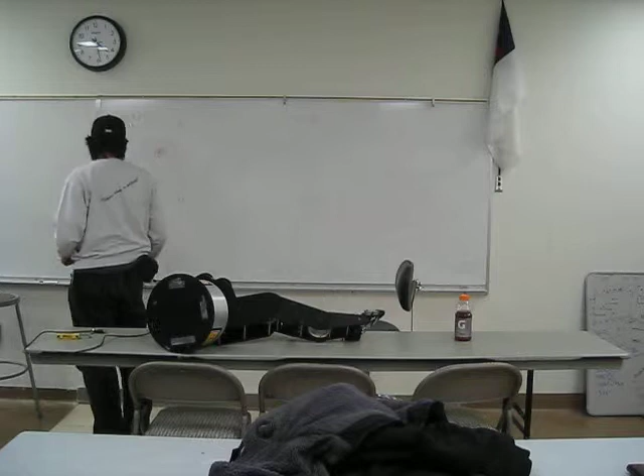Okay, so we have our power source, right? Battery. What does that battery connect to? The battery has a plus and a minus.

Well, you guys all know how electricity works? It's like water, kind of, yes. It can be, well at times you use the water analogy to understand it.

We say that electricity on a power source, like a battery, is trying to flow from the positive terminal back to the negative. In actuality, what's happening is electrons are going from negative to positive, but that doesn't matter. You can look at electrical flow either direction, but most people like to think of it as flowing from positive to negative, as if it were water flowing.

But like water, it needs something to flow in. So we use wires, which have very low resistance, so that electricity easily flows through them. Everything surrounding it, like the plastic insulation or the air around you or your body itself, has higher resistance, so the electricity doesn't flow through those things.

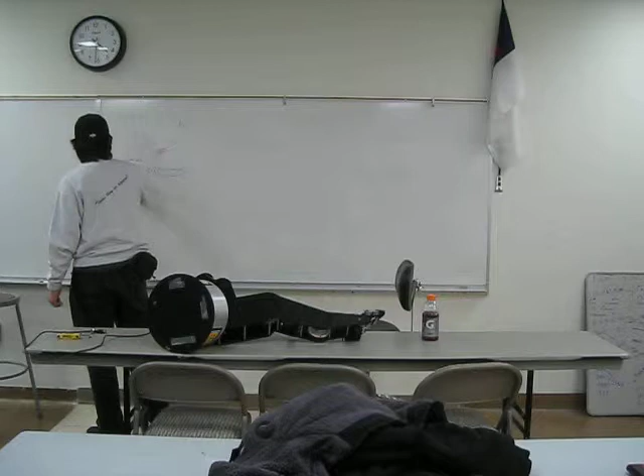That's not exactly true. Okay, so this is our main breaker, which you all should know how to operate. Then this goes to what we call the power distribution box. Okay? So that has a plus and minus connection.

What this is really just a fuse panel. We'll have a bunch of different breakers in there. So internally, the plus is connected to each one of these breakers, okay? And they'll all be rated for something like 40 amps or 30 amps. Okay? These are resettable circuit breakers.

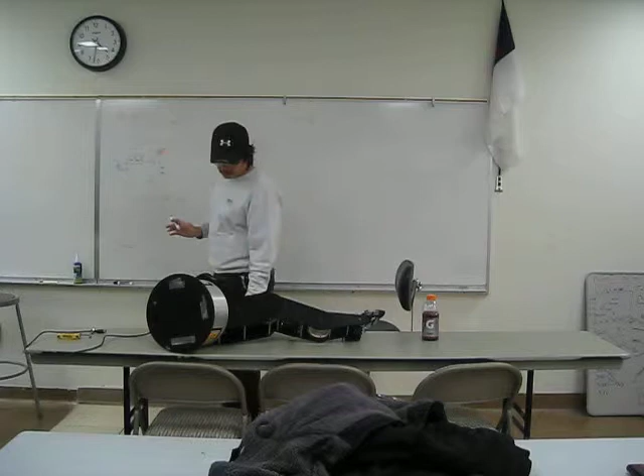What happens is if the current exceeds this amount, this rating, this will actually open up and stop the flow of electricity. Okay? Until this cools back down, and it makes the connection again.

Get that? So say externally here, you accidentally wired this to here. There's this extremely low resistance path back to the battery, and this current can be over 100 amps. Okay? As this high amount of current flows through here, it will heat this wire up. If it didn't have the circuit breaker, this wire will probably eventually heat up so hot that the insulation will catch on fire.

Okay? If you were to touch this wire, it would just burn right through your skin into your flesh. It'd be very, very painful. Okay? And can cause a fire. So, to prevent all that, we put circuit breakers in there.

So on the board, you'll see a bunch of red and black connections. Each one of the red connections goes to a circuit breaker. Each of the black connections actually gets connected to this negative terminal up here. So if they were to take two of these, one leg of this, and go to a speed controller, that then goes to a motor, which acts like a switch. So if it's full on, this motor will be running at full speed.

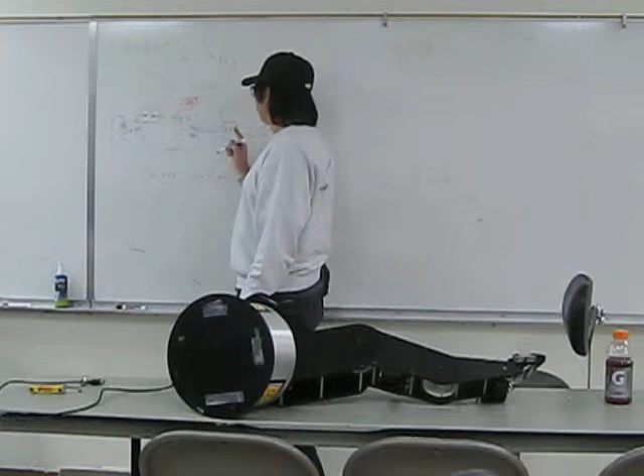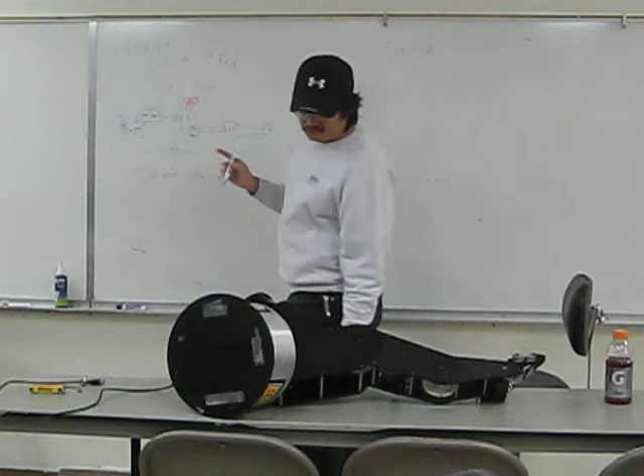There's actually a little computer in here running a bit of software that can switch this on and off about 2,000 times a second very quickly. Based on the amount of time it's on each time it turns on, you can actually vary the speed of this motor.

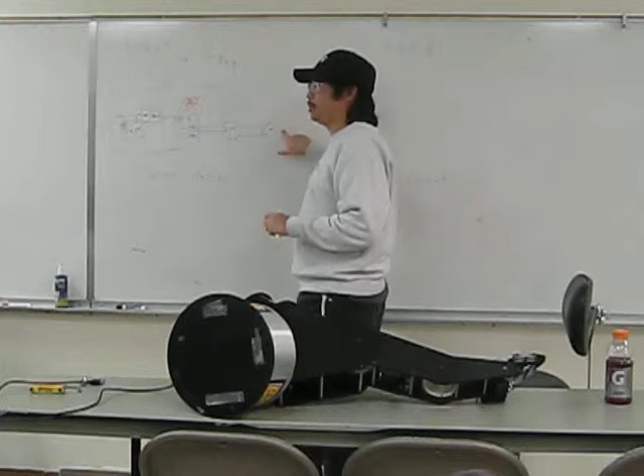So we're going to have a lot of these. We're going to have at least 2 for the drivetrain, at least 1 for the shooter, and however many you guys decide you need for climbing.

Then the way this is told what to do is we have our C-RIO, which is going to be the brains of the robot. This is another little computer, and we're going to write the software for this computer to tell it what to do. One of the things it does is control the speed controllers.

So there's a control signal called PWM, which this generates. It's an electrical signal that goes to the speed controller and tells it how fast or in which direction the motor needs to turn.

Sidecar? Yeah, it actually comes from the digital sidecar of the C-RIO, but just for simplicity, the electrical guys call it that.

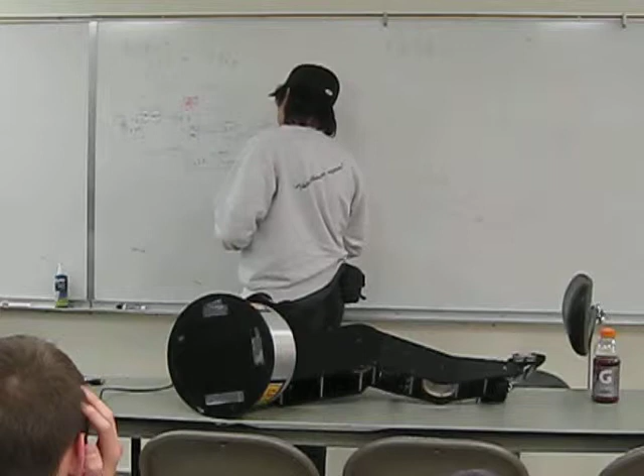The C-RIO software can turn this on and off, and then we can use this air pressure to move pneumatic cylinders. Those are the main outputs. We can also use these to turn lights on and off.

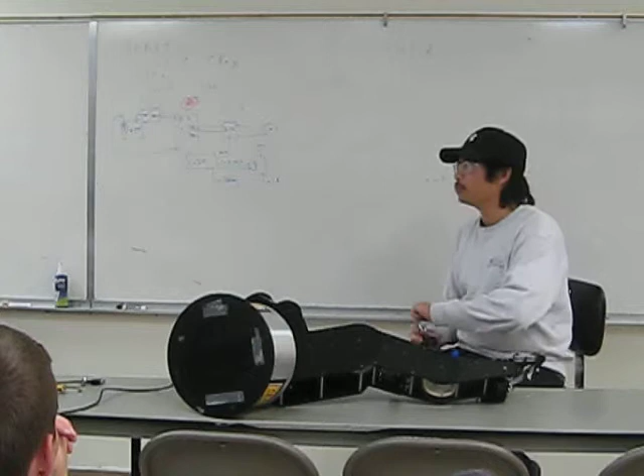There's also spike relays, which are electrical switches. If you had a spike relay hooked up to a motor, the only thing you could do is tell it to be off so it doesn't rotate at all, rotate full speed in one direction, or rotate full speed in the opposite direction. If you need a speed in between, you'll have to use an electronic speed controller.

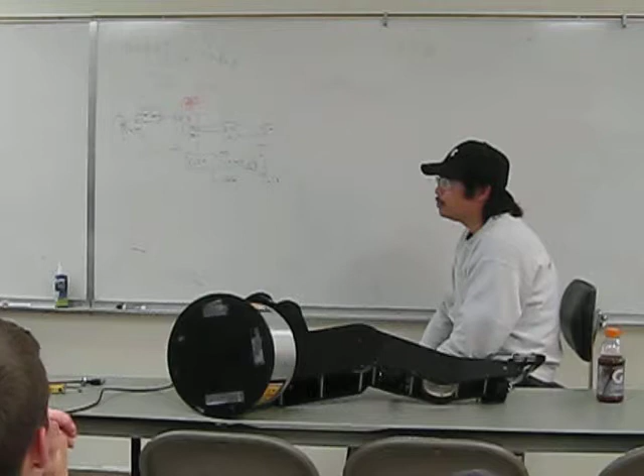So what are some of the inputs to the C-RIO? They can come from sensors on the robot - you can have photo sensors. There are also position encoders that you could put on the end of the motor shaft, so you could actually tell how fast it was spinning, or if it was spinning at all.

No? Okay, need some help?

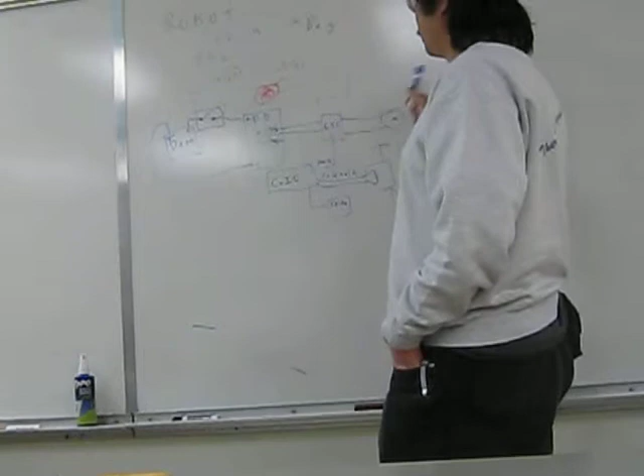A very important one is limit switches. Say you're using this motor to move an arm, but you need a way of knowing when to stop it. You can have a switch that gets pressed when the arm has reached as far as you want it to go. The C-RIO will know that switch is pressed, stop telling this speed controller to move this motor, and then the motor will stop and the arm will stop.

Okay, take it, watch this. Now...

A very important input and output on this is actually an Ethernet connection. This is how we're going to communicate to the C-RIO. All this stuff is in the robot. This is our wireless bridge or access point, depending on how we have it hooked up.

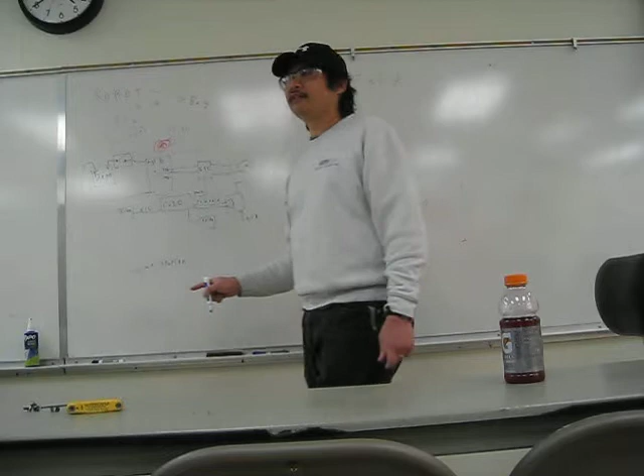So now, going back down to the driver station - the driver station has size constraints. Does anybody know what those are? Does anybody know where to find them? It's online. There's a size constraint, right?

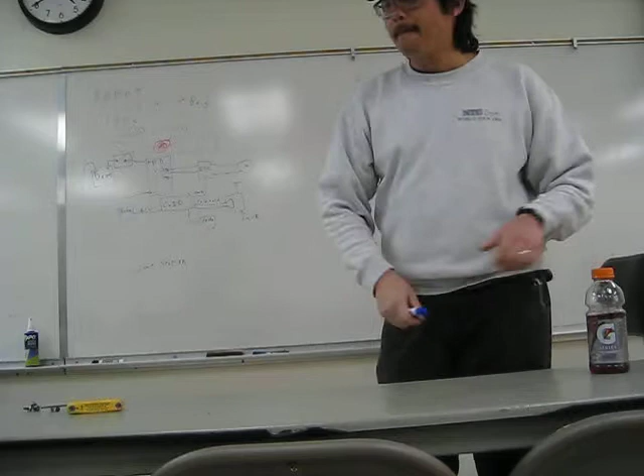Why? You only get a certain amount of space when you go to the field. On the field, at each Alliance wall, there's a shelf that your driver station must fit on. So in order to build our driver station, we need to know its size constraint.

Is there any weight constraint? I think so - no, okay. But the size constraint just tells us the maximum size it can be. We may have other reasons we want it to be smaller, so that it's easier to carry around, since it's something you're going to have to carry onto the field and off the field. So it'd be nice if it had handles and was only as big as it needed to be.

So the driver station is going to have some sort of mechanical structure to hold all the pieces it's comprised of together, so that we can just move it to the Alliance wall shelf as one piece. We just put it down, plug in the wires we need, so that can be done very quickly and be ready to play.

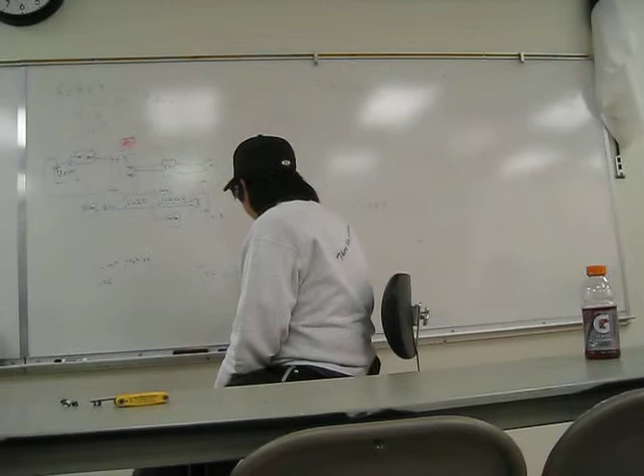This is actually, the heart of it is actually a PC, right? It's the little classmate computer, okay? Connected through a USB hub, we're going to have input and output devices, okay?

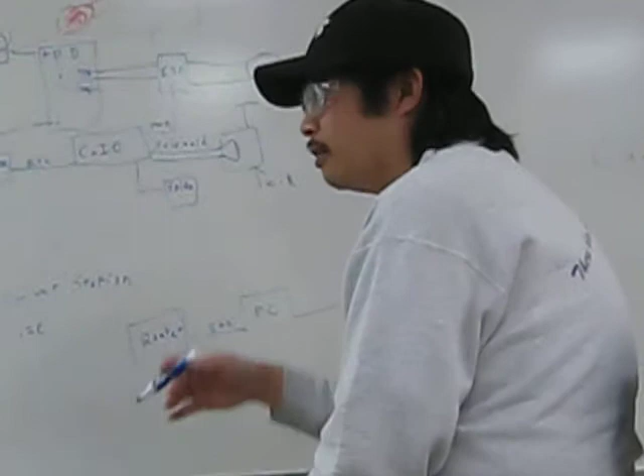This is going to have an Ethernet connection right now to a router, but then later on at the competition, this Ethernet connection actually goes to what they call the field management system, so that they're able to control our wireless connection to the robot and actually cut you off if they need to.

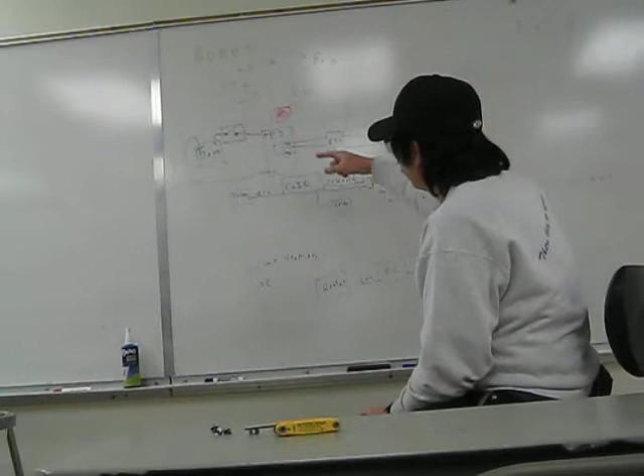So through the field management system, they can tell whether you're actually communicating with your robot. They won't start the game until they know everybody's got a connection between their driver station PC and the cRIO in the robot. And then during the game, if they need to disable your robot, they'll cut off this wireless connection, okay, for safety.

So in this PC, you have a piece of software called the Driver Station. What's its official name? Driver Station, I think it is called. There's a program in there called Driver Station, and what it does is it communicates through the USB port to any input devices you have.

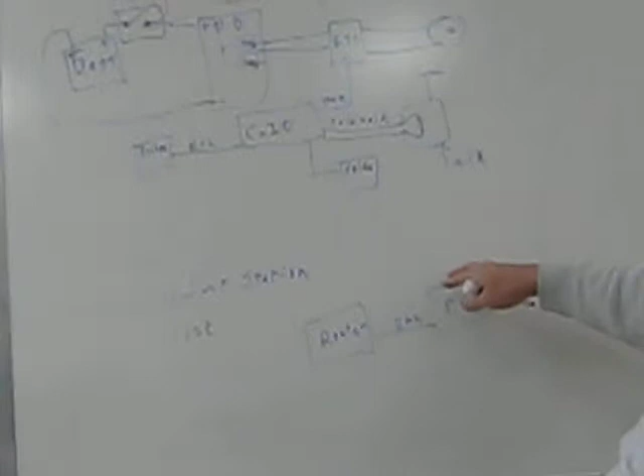It figures out what it is you want to tell, and it reports the position of all these input devices to the robot through the Ethernet port. So it will take that data, form it into packets, send that packet via Ethernet to the router. The router sends it wirelessly through Wi-Fi to here.

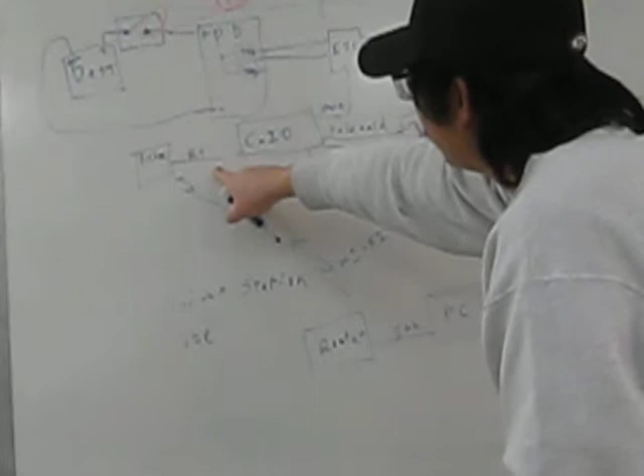And then this packet will be, by the bridge, translated from Wi-Fi back to Ethernet, wired protocol, into the cRIO. The software in the cRIO will see this packet, say oh this is for me, and read the information out of it, and then the software that you wrote that's running in the cRIO will know what that means. Oh, this joystick 1's x-axis moved, is at this position. That means I need to tell this speed controller to be at this speed.

This connection is actually bidirectional. So you can have sensors on here, like a temperature sensor. At the minimum, you need to have a voltage sensor that this reads, that reports that value back to here.

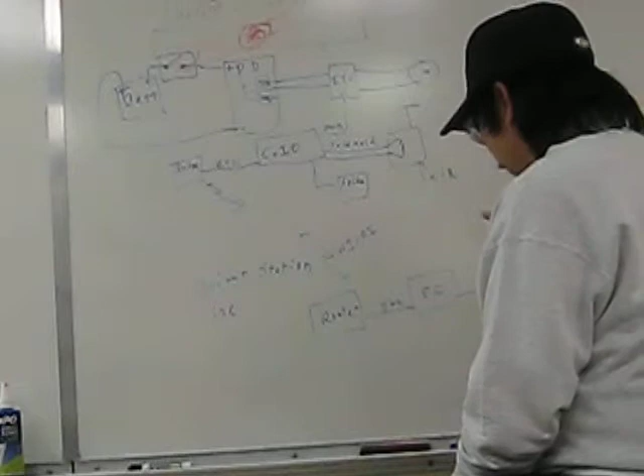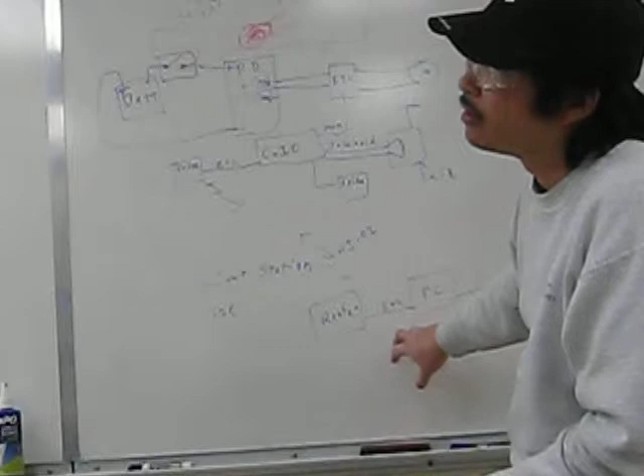And on the screen of the classmate, that's a separate program, right? Called the dashboard, I think. It's not part of the driver station - they all come up at the same time, I think, but there's another piece of software that will then display. Oh, is it part of the driver station, isn't it? I think we just call it the dashboard on the driver station. I don't remember its official name. Well, whether it's the same application or a separate application, the applications know where to get that data.

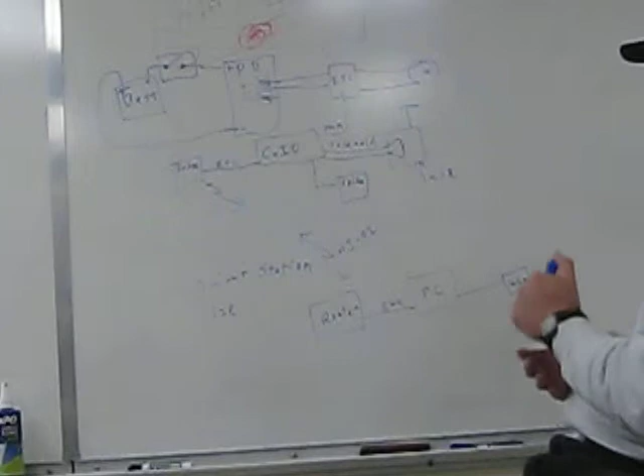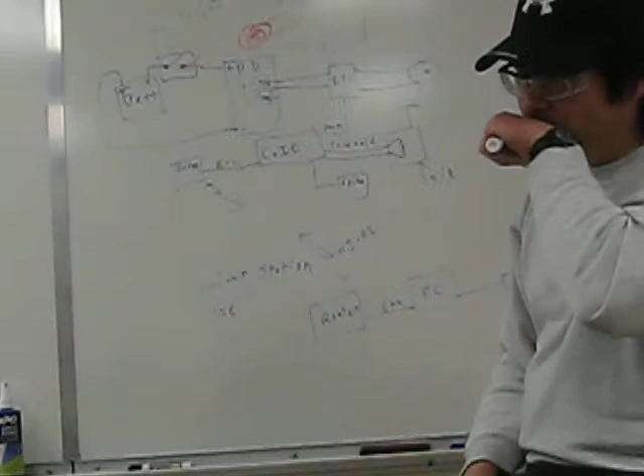So you could have things like an encoder that tells you the position of something. You could know how fast your robot is going. You could have a temperature sensor on each motor to know whether you've got a motor overheating or not, and do something based on that or not.

Another thing you can actually have on here is a video camera. That video camera actually connects via Ethernet to the cRIO. The cRIO can do things based on the video it's seeing. You can actually have software running in here that will analyze the video feed and make decisions based on what the camera is looking at, like the vision targets around all of the goals.

Or you could just feed that video data back through Ethernet and then Wi-Fi and back to the driver station and display on this PC what this camera on the robot is looking at. So you could use that to aim it.

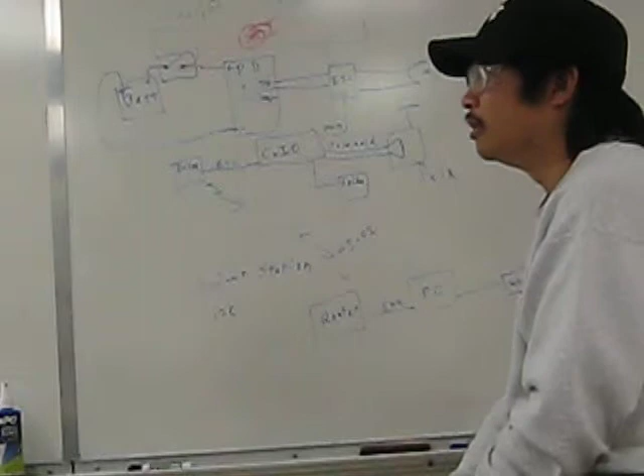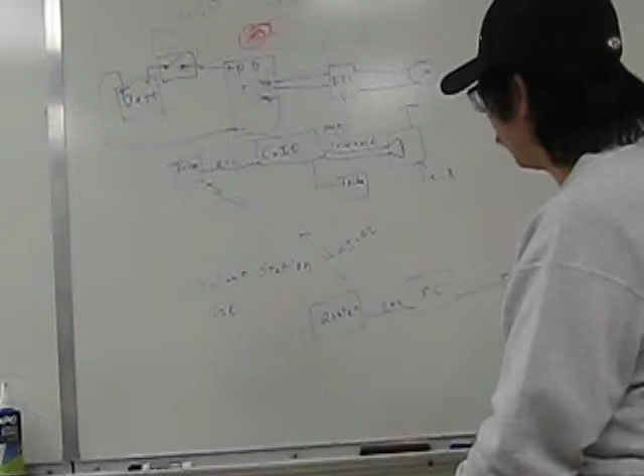So instead of having a tight feedback loop where the cRIO is deciding, oh, the camera's telling me that the target's to the left, I need to move the robot to the left a little bit before I shoot, you could have that information come all the way back to here. The human player looks at that, decides what to do. Oh, I need to move it to the left, moves the joystick a little to the left. That then goes out to here, tells this motor speed controller which way to go, and then the robot moves a little bit, and then you press the button that makes it shoot.

In order for the robot to do all that itself, it needs to have a lot more intelligence built into the software, but it can do it a lot quicker because there isn't that delay of someone deciding what to do. Okay, so what kind of input devices can we have on this PC?

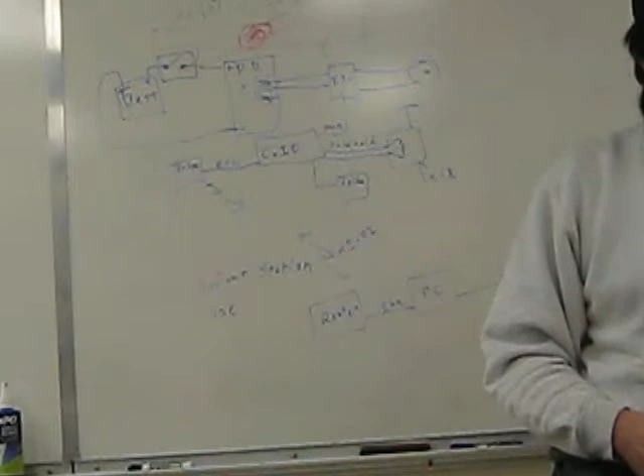Joysticks and the e-stop button. At minimum, you could have a joystick. The e-stop button goes into the USB hub, it's just a big on-off switch. Once you hit that, it tells the driver station software to send a message to the cRIO to shut down, to stop everything, stop all motors, stop all solenoids.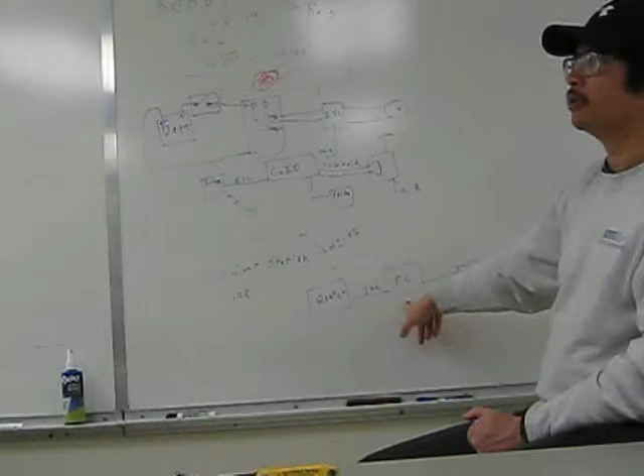It's like hitting the disable button in the driver's station software, which will then ignore any input you give to the joysticks or whatever you have. When we're on the actual playing field, we won't need that button because there'll be another button up there, a big red button, that goes directly to the field management system, which will then disable the robot by disconnecting your wireless connection to your robot through the field management system.

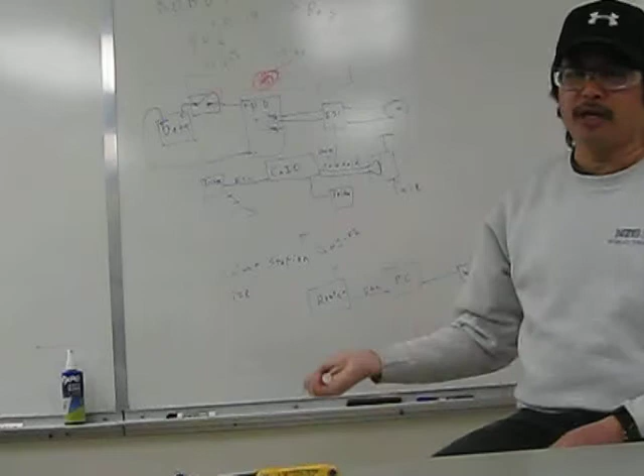Okay, so other than joysticks, what could you have as input devices? You guys all have computers, right? Do you all have joysticks on them? No? What do you have? A mouse, right? Got a mouse? So you could have a mouse. You could drive and control this thing with a mouse. What else?

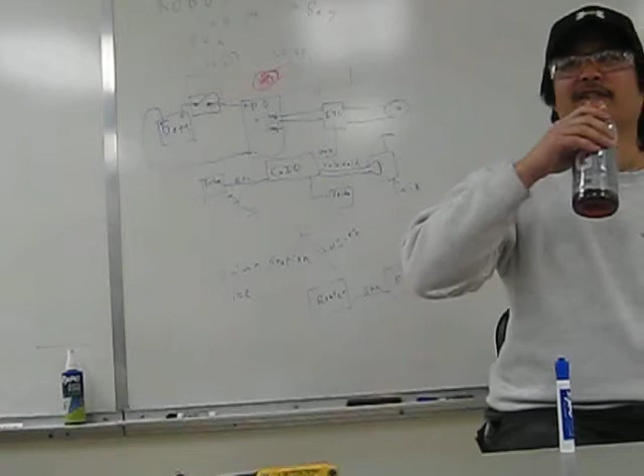External keyboard. Yeah, either the built-in keyboard, because this is a laptop, or you could have another keyboard. What else?

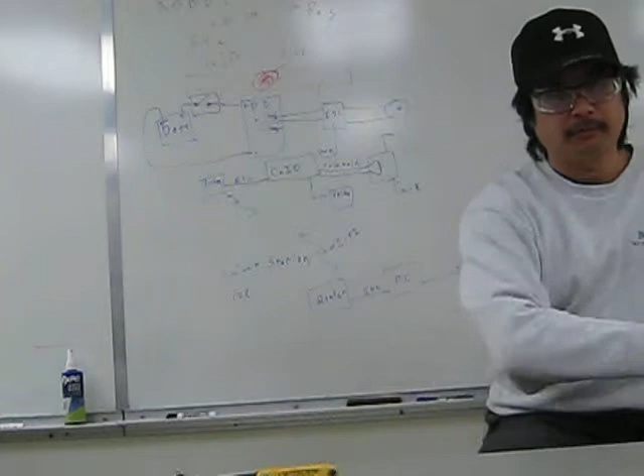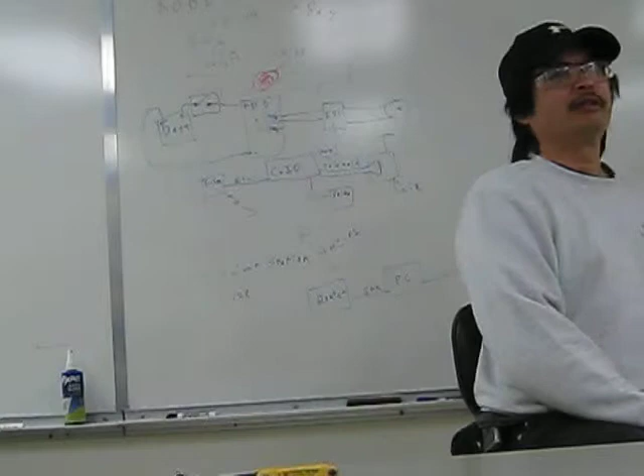Controllers, yeah, video game controllers. You can have an Xbox controller, PlayStation controller, right? Wiimotes, what else? Touchscreen input. Yeah, touchscreen. You could somehow connect a tablet to this, it would be a touchscreen. All right, connect, use one of those. So you wouldn't even have to touch anything.

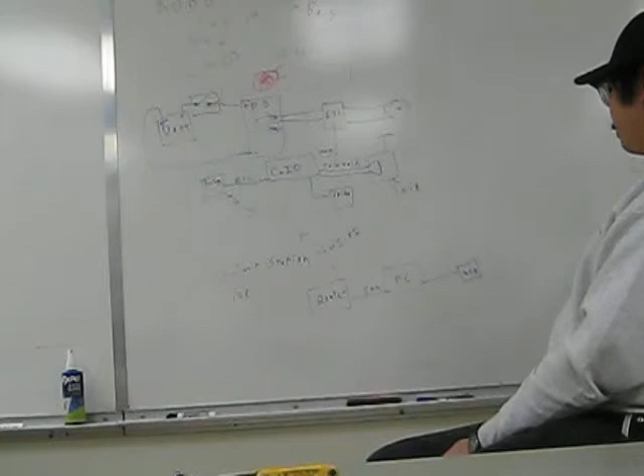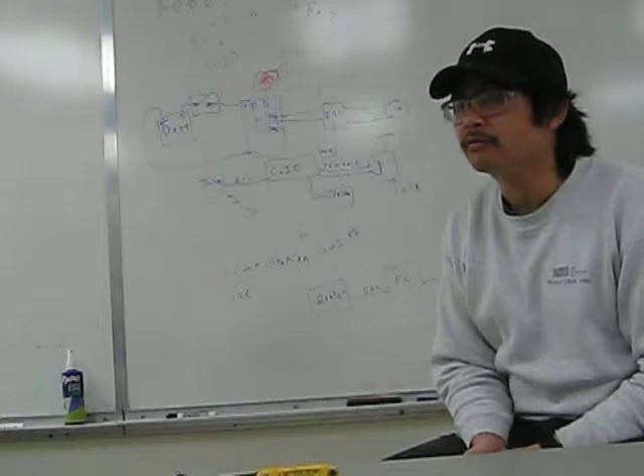Using some of these may require special software, or special hardware out here in order to make one of those act like the device that we already have the driver software for, right? So you could build some hardware that connects to a massive array of switches, and that just acts like the joystick buttons that you have, okay? So that's one thing you need to figure out, what input devices we're going to have.

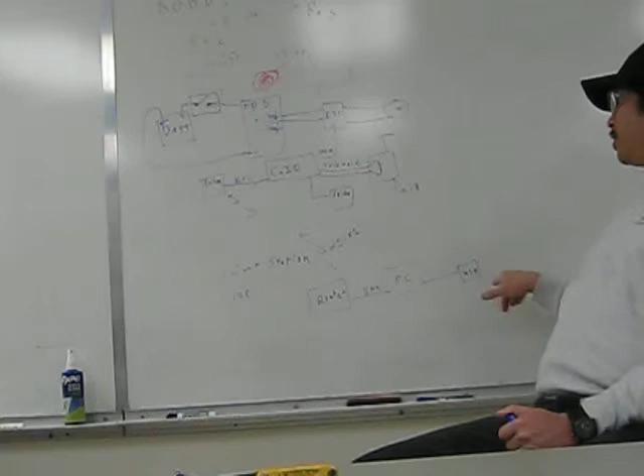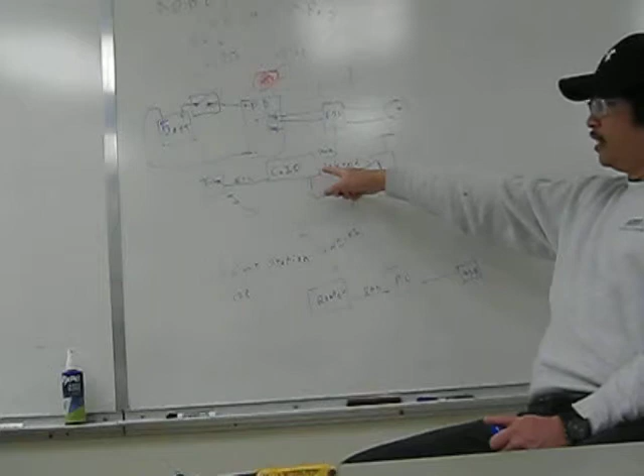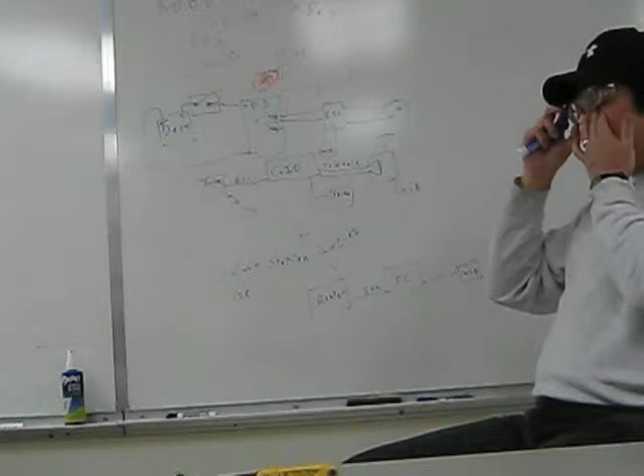So that goes along with what functionality we have in the robot, right? Because any one of those can tell any one of these devices what to do, but is it the best way to do that? Because you could use a joystick just to turn a spike relay on and off, but that doesn't make as much sense as using a button, which has two positions, either you're pressing it or you're not. This switch is either on or off. But you could use a joystick, and software in here can know that, okay, don't flip the switch until I push the joystick all the way to one end or the other. It's kind of weird to do that, but that is something you can do.

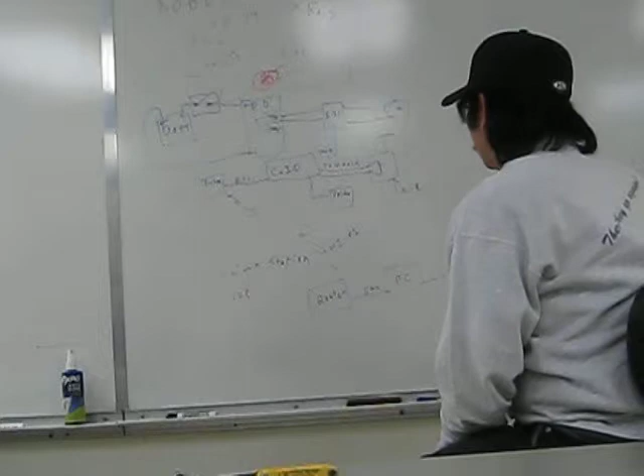So, decide how is it we're going to tell each one of these devices what to do. Okay, so that's the basic control system.

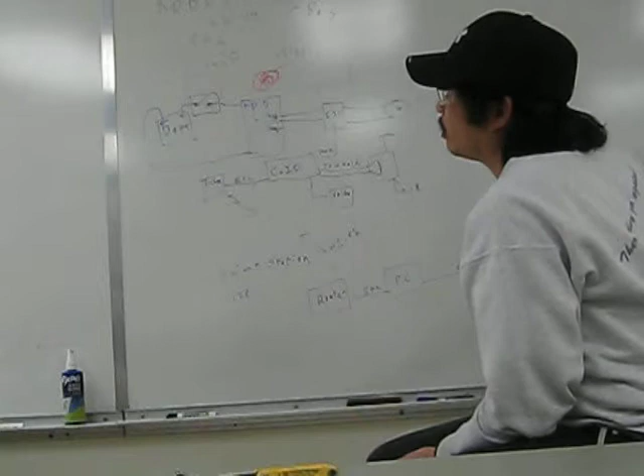Okay, so for our cart, we don't really have... well, yes we do, we have a time constraint. We absolutely do have to have this by the time we go to Davis, because you will not be allowed to play unless you have a cart for your robot. It'd be nice to have it before that, so it'll make it easier to move the robot around here, because we're probably at some point going to take it outside to test it.

All right, so what are some of our constraints on our cart? Has to fit the robot, has to be able to hold all of the robot's weight, right? What else? It's gotta move, right, so you got to be able to push it around.

Okay, so in all likelihood, it'll end up having 4 wheels. 2 of them should be caster wheels, so that this thing is steerable, and 2 of them should be just fixed wheels, pointed straight, kind of like a shopping cart. You all know how a shopping cart works, right? So what goes wrong if we had 4 casters?

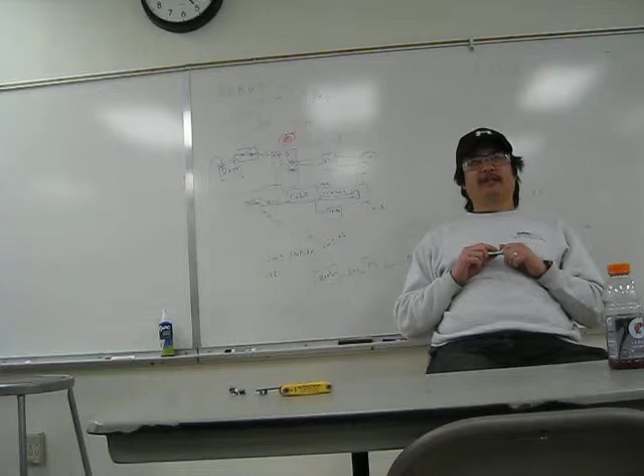Which we've done before, so you remember that? 4 casters, 2 power wheels then. No, not the robot, but the cart design. Imagine a shopping cart that had 4 casters instead of 2 fixed wheels, the whole thing could move sideways. So as you're pulling this thing behind you and not looking at it, it could start to move sideways and crash into people or knock something down. Not a good thing.

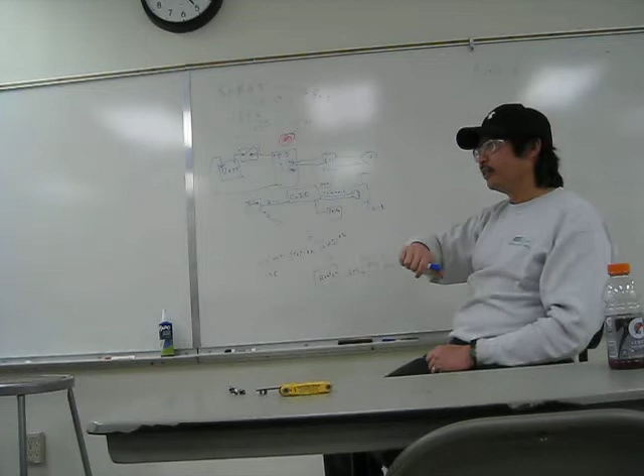So if we're gonna have 4 wheels, have 2 of them fixed pointed straight, have 2 of them as casters, and have your handle at the caster end so it's easier to push it around and move it. Use a solid handle, don't use a piece of rope. If you drop it, it can get under the wheels and get caught, and also you can't push a rope. So now you can only pull the cart, but say you want it to stop - the rope just gets slack and the cart just keeps on rolling right into you. So you have much less control over it.

Like I told you, there's gonna be 6 robots on, 6 robots off, 24 people on, 24 people off, all these field resets. So there's a lot going on, you need to have control over your thing. This thing with the bumpers and the battery is going to possibly weigh over 120 pounds. You don't want this thing just rolling around into people, cutting people's ankles and bumping into them, knocking them over. You need to have control over it.

Another size constraint is, say we built the cart in that little room, put the robot on it, and want to go outside. So what kind of size constraint do we now have? The doorway and the hallway - not only do you have to fit through the door, but once you get through the door, you're going to have to turn left or right, be able to go down that hallway and out whichever door we decide to go out. So whoever's designing the cart, there's a lot of important stuff you got to pay attention to. It may sound simple, but if you get some of those wrong, we may not ever move it out of that room.

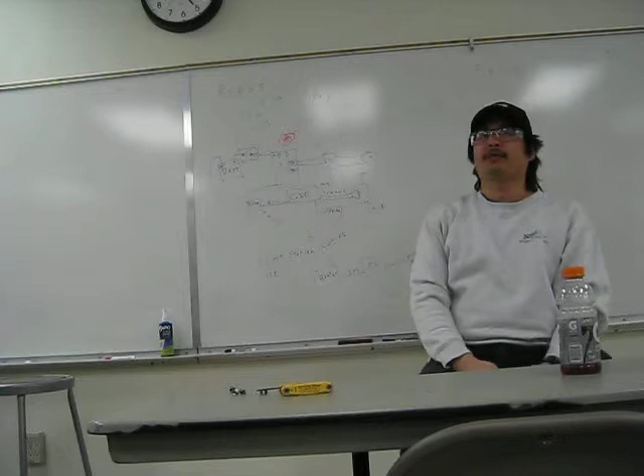So why are we building this field equipment? To practice, to simulate, and also to help us design this thing. Until you can actually visualize and try what it is you need to accomplish on the field equipment, it's kind of hard. It gives you a better idea of what you need to accomplish.

So the sooner we have it, the better. I saw Bryce building goals on the weekend, and I guess there's sort of a plan for a pyramid, which needs to get firmed up because that's going to be one of the trickiest things to do.

So does everybody know what part of the robot they want to work on? Nobody? Alright, let's go one at a time then. Probably shooting - launching weapons. Oh okay, you're going to be working on the mechanical part of it?

What about software, are you going to be doing that again? Not really. Really? I could do it later, maybe after Jerry's gone. Where's Jerry going? Well, he's not going to be here next week. Right, but it's always better if we have more people who know how to do the different parts of it, because like right now, if we needed to change software, he's not here.